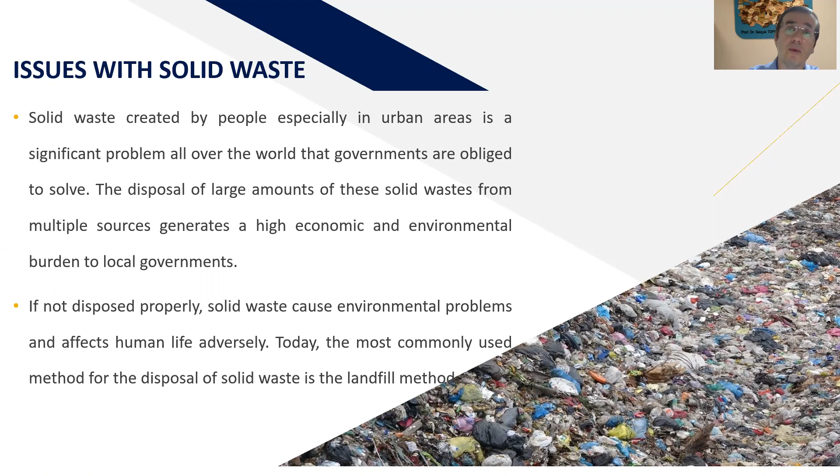The disposal of large amounts of this solid waste from multiple sources generates a high economic and environmental burden to local governments. Solid waste causes environmental problems and affects human life adversely if not disposed of properly. The landfill method is the most commonly used method for the disposal of solid waste today.

Before the landfill application, solid waste was disposed of randomly to an area outside the city by open dumping. Even in the countries which started to use the landfill method, abandoned open dump sites continue to endanger the environment and human health.

We need to focus on particularly 3 vital problems regarding open dumps. The first one is methane gas, a greenhouse gas that's 28 times more potent than carbon dioxide. Leachate and the change in soil properties is the second vital problem, which particularly concerns ground pollution, soil pollution, and groundwater pollution. The third vital problem is structural stability in open dump sites, which is related to slope stability issues.

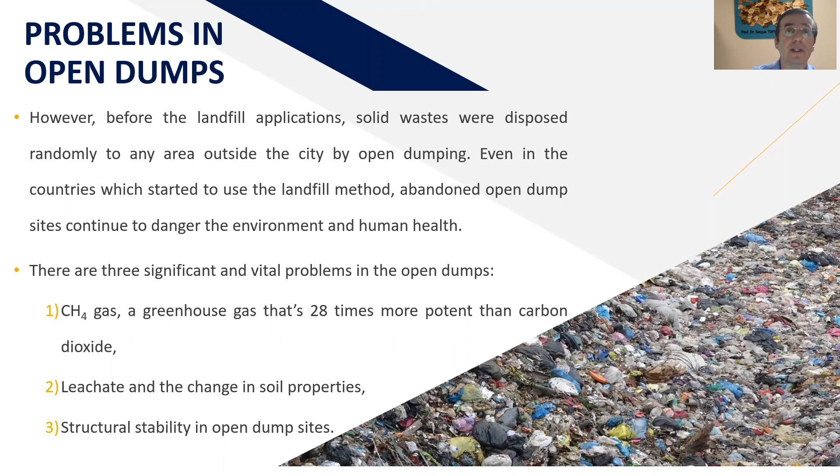Especially if the open dump is close to water bodies, it creates a particular, specific environmental and human health issue.

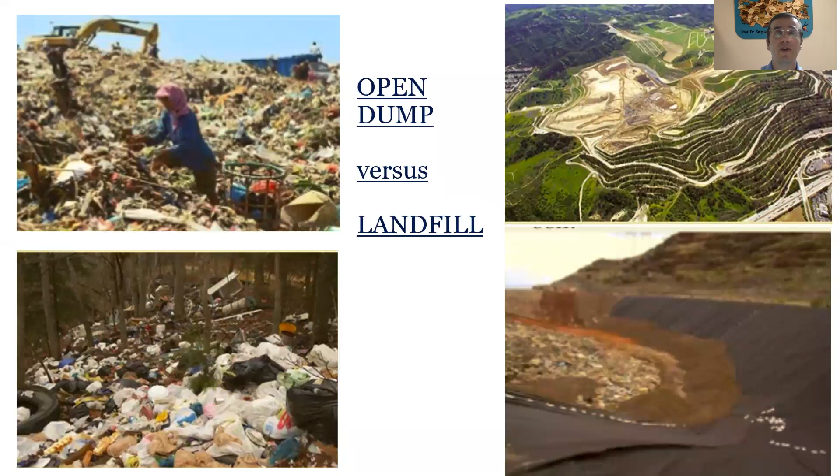These pictures actually show you clearly the difference between open dumps and landfills, but we can state them as certain items. A dump is an open site where waste was dumped in a pile, while a landfill is an engineered system designed to dispose of waste in a manner that protects public health and natural resources, and it is regulated by the government. A dump does not have a leachate collection and treatment system, while a landfill does.

A landfill has a liner at the bottom to catch the liquid produced by solid waste, while a dump does not have a liner. Landfills are covered daily with soil to deter pests and prevent bad smells from being released into the air, while dumps may be covered or not.

After a while, landfills might produce toxic gases which are released into the air and ground, or may be used in energy production.

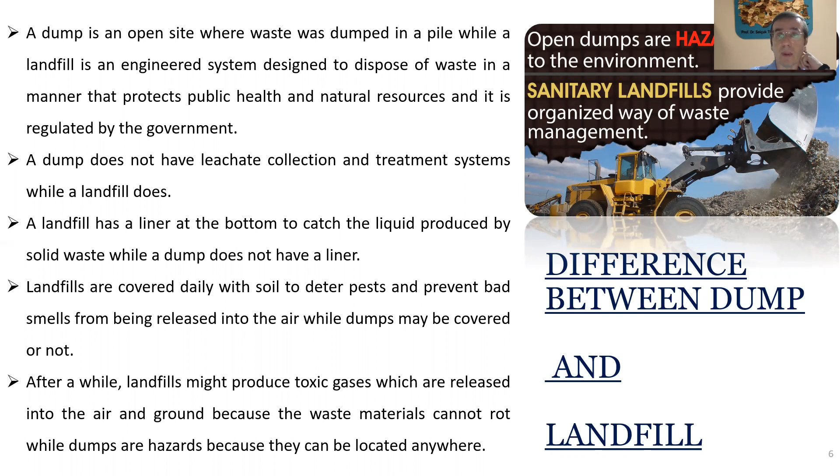Recently, the World Bank published a report about global treatment and disposal of waste in the world, and according to the report, at least 33% of waste in the world is not managed in an environmentally safe manner.

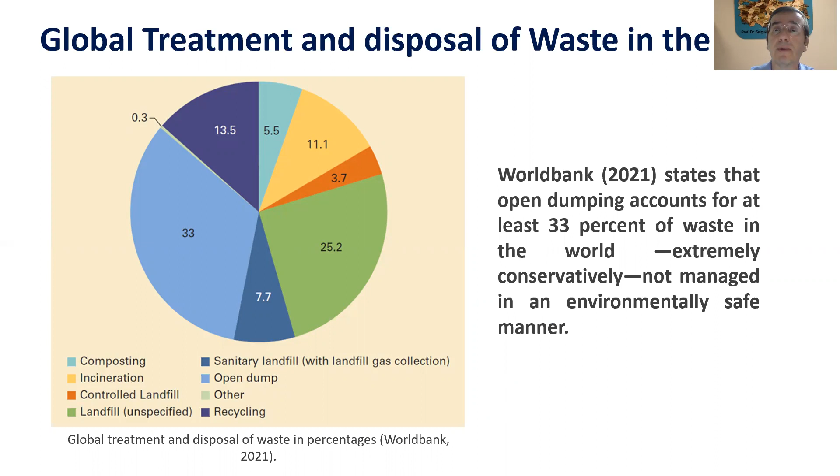Do we need rehabilitation? Yes, open dump sites that are no longer in use need to be rehabilitated, and existing ones should be improved. Even if no solid waste is placed into abandoned open dump sites, the existing dangers still remain.

The European Union has a directive on landfill of waste, which defines the limitations and procedures to be taken in order to prevent or minimize the threats to the environment.

Within the scope of these international projects, intellectual outputs are produced for target groups on the rehabilitation of open dumping sites which are forgotten or ignored after the establishment of a landfill, but still exist as a potential hazard.

The target groups include, but are not limited to, decision makers, engineers, technicians, vocational trainers, and researchers. Because the problem is common in the countries of the partners, the solution requires transnational cooperation, sharing resources, and developing results applicable to this international problem.

Let's have a look at the distribution of municipal waste generation in European countries. We can do that in a comparative way by choosing the years 2007 and 2018. The comparison shows that changes per person within this period are not significant for many countries.

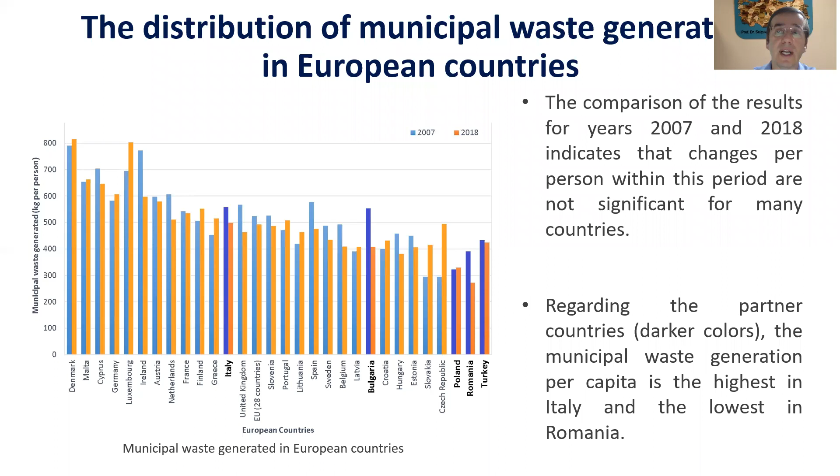Compared with the previous figure, there is a significant difference in this figure, which shows the recycling rate of municipal waste in European countries.

Recycling of municipal waste increased considerably in many European countries. This trend clearly demonstrates the importance of keeping up with the policies of zero waste in the coming years. Among the project countries, the recycling rate of municipal waste is highest in Italy and lowest in Romania, according to 2018 statistics.

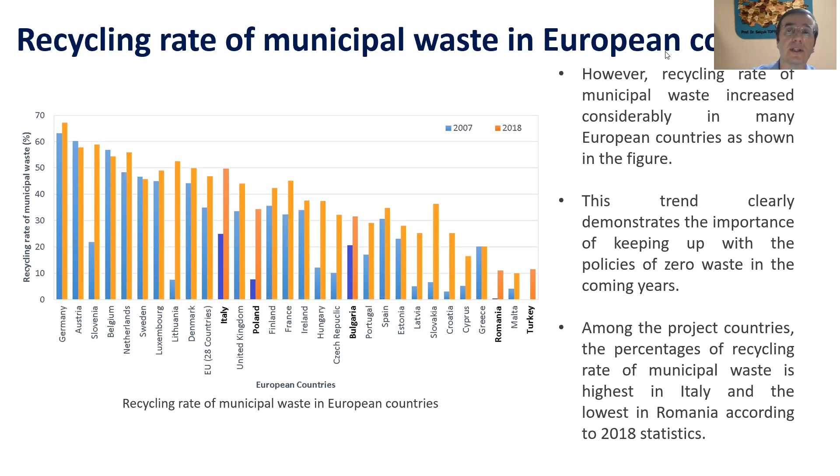According to the Domestic Waste Action Plan of the Ministry of Environment and Urbanization in Turkey, there are more than 800 open dumps in Turkey as of 2016, and 8 million tons of municipal solid waste is disposed of in open dumps.

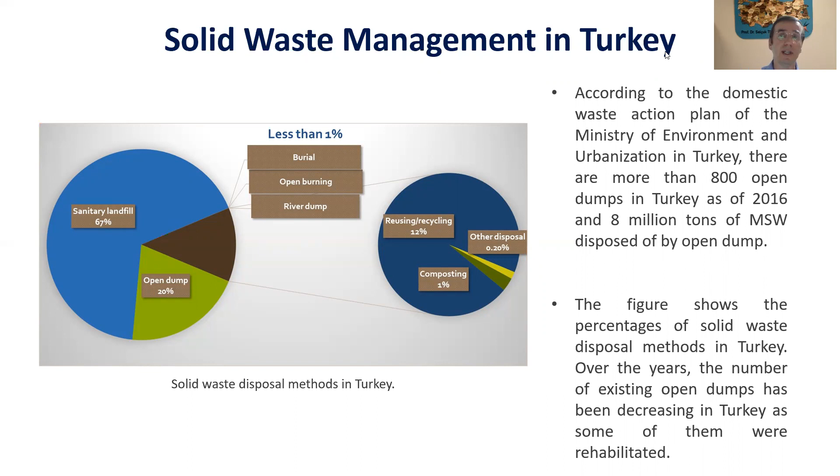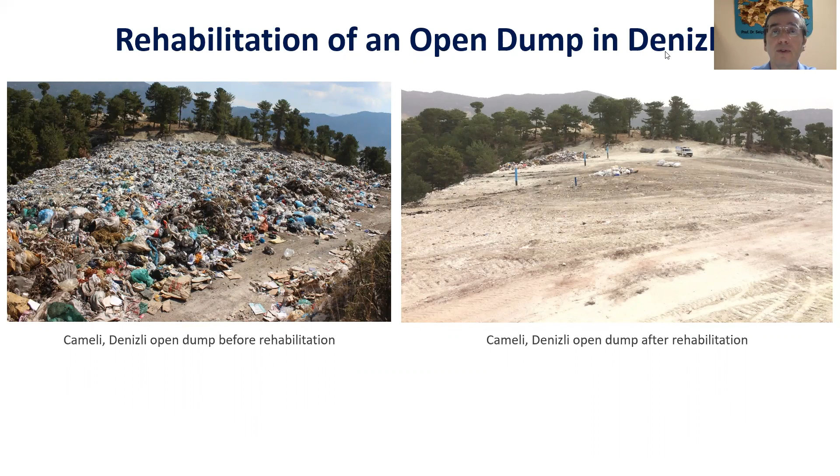Over the years, the number of existing open dumps has been decreasing in Turkey as some of them were rehabilitated. Here we can see an example from Çameli, Denizli. The left figure shows the area before rehabilitation, and the right figure shows the open dump area after rehabilitation.

The project produces 5 intellectual outputs, namely: smart decision tool for rehabilitation of open dumps, multilingual e-learning platform, competence tool, learning modules, and smart guidance manual. The target groups benefit from these outputs and develop competences in various sustainability relevant sectors so that they will be able to handle issues related to rehabilitation of open dumps.

There are planned multiplier events and workshops to take place in each partner country. The multilingual e-learning platform includes the competence path of learning process in smart devices and web platform, according to learning outcomes and training units, forming personalized training paths for specific professional competence and reference level.

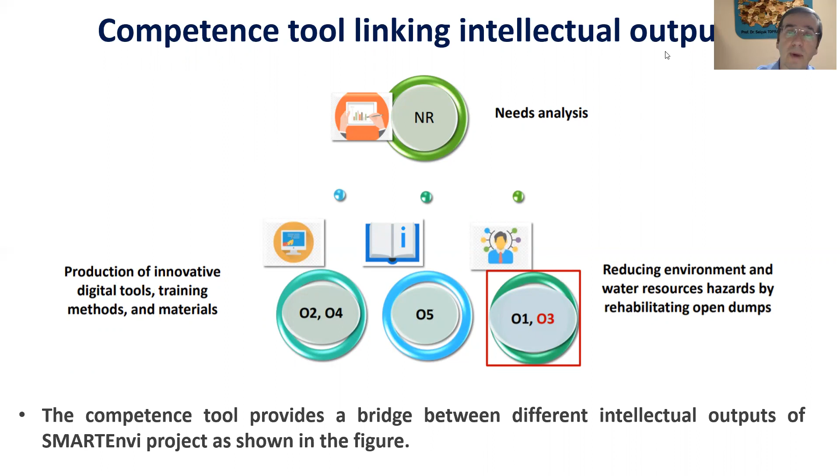The following intellectual output is the Smart Decision tool. There are many components and risk evaluations in deciding the best way for the rehabilitation of open dumps, involving legal, technical, technological, environmental, and economical dimensions. These multi-dimension considerations and complexity of the problem make it a requirement to apply smart digital systems in this solution.

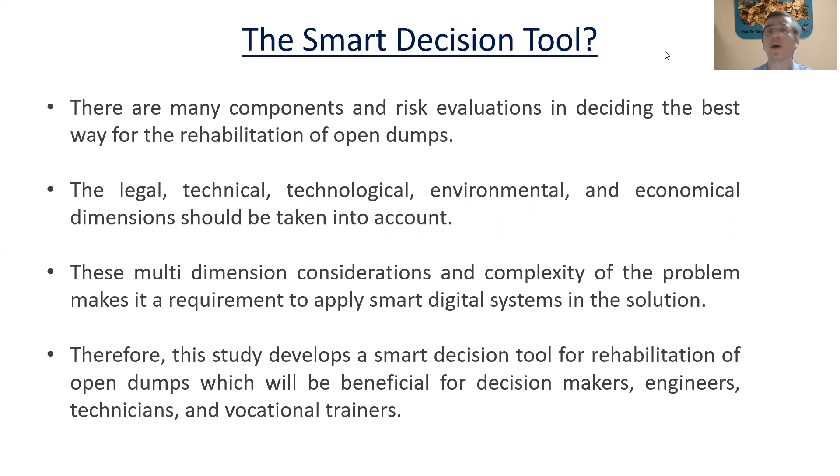The smart tool guides users interactively through the open dumps rehabilitation assessment process and helps them make risk-based optimum decisions, and it works on different platforms.

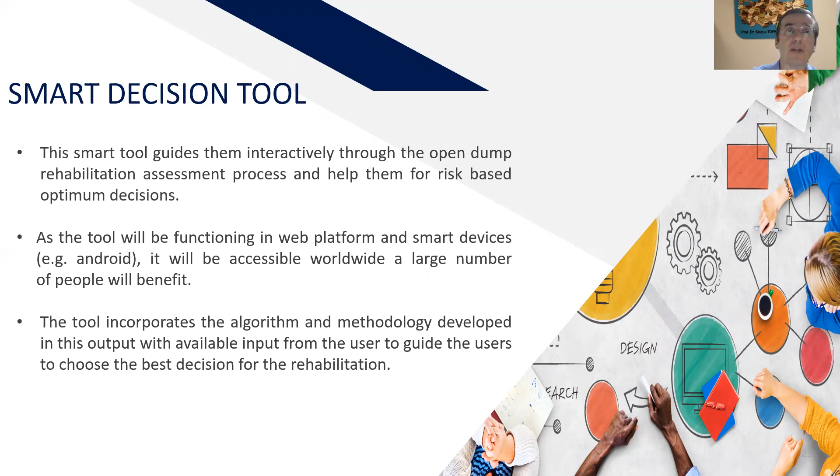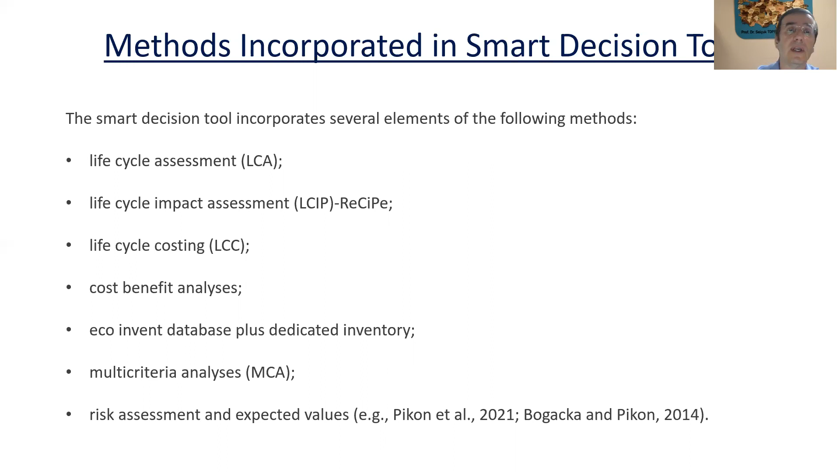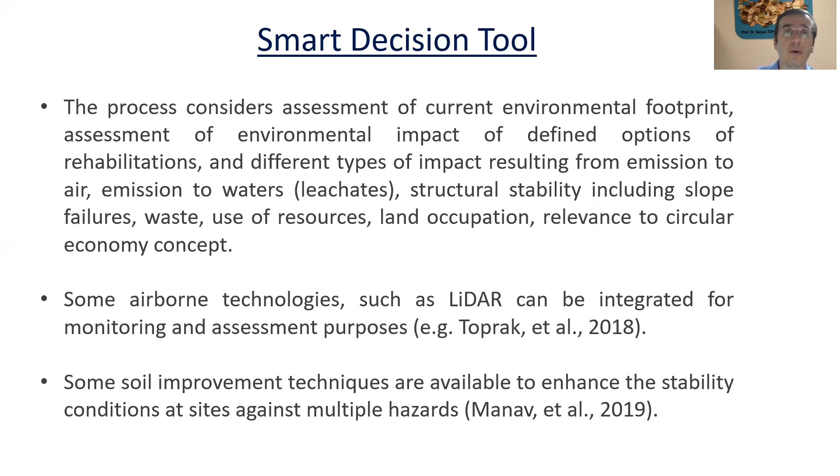In summary, this project, abbreviated as SMARTEnvi, seeks to develop, pilot, and test innovative digital tools, training methods, and materials for reducing hazards to our environment and water resources by rehabilitating open dumps. I already presented the details of those intellectual outputs of the project.